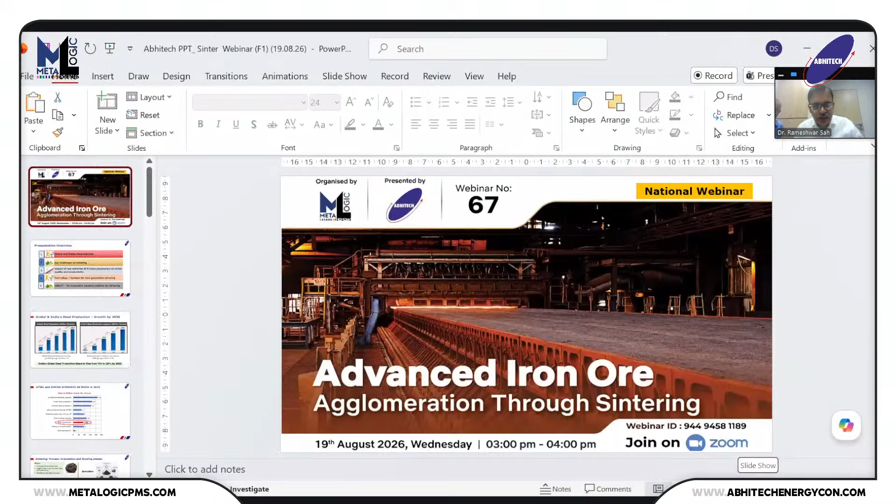The topic of the webinar is very apt and relevant to the steel industry because for any integrated steel plant, it is the sinter making which is the heart of the iron production, and that in turn is making the steel. Moving on to the slides, I have divided my presentation into 5 subtopics, which basically goes through the journey of how the sinter contributes to the steel making.

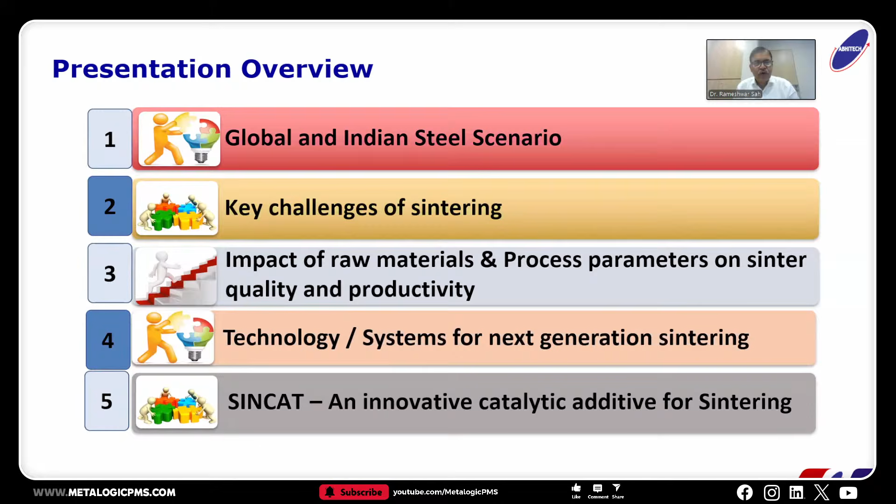So once we talk about the sinter, how can you forget about the steel? Looking at the global and Indian scenario of steel making and their growth by 2050, the global steel production is going to increase from its current level of 1,985 million ton to the level of 2,500 million ton in the next 25 years. So overall, this industry is going to grow globally at a CAGR of only 1%.

While in India, the steel production capacity charted out by the Steel Mission for 2030, and subsequently for Viksit Bharat in 2047, is at the level of 500 million tons of steel production. So India is growing its steel production at a CAGR of closely around 4%. The share of Indian steel will rise from 9% to 20% by 2050.

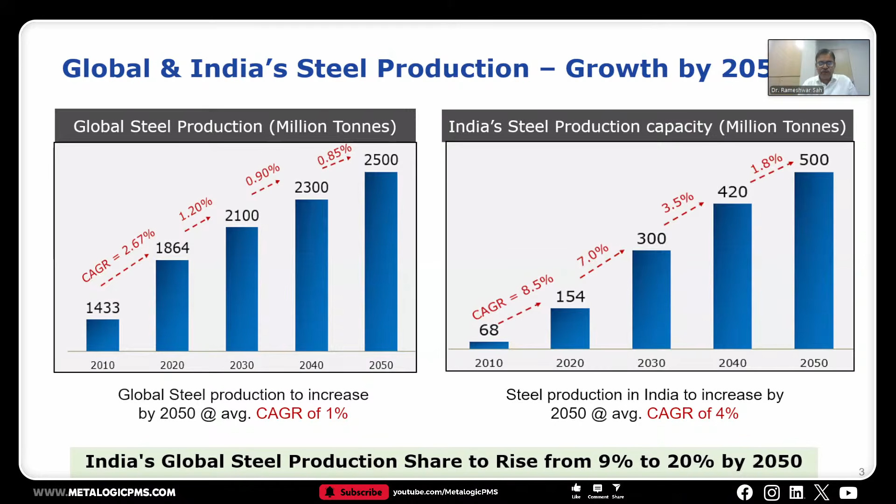Now moving on to the details of why the sinter is important. Looking at the vital statistics of steel by the year 2025, India has an installed steel making capacity of 220 million ton. The crude steel produced in 2025 was 168.4 million ton, and finished steel goes to 161 million ton. We find that almost 46% of the steel India is producing is coming through the blast furnace and BOF route, where the hot metal produced is close to 95 million ton.

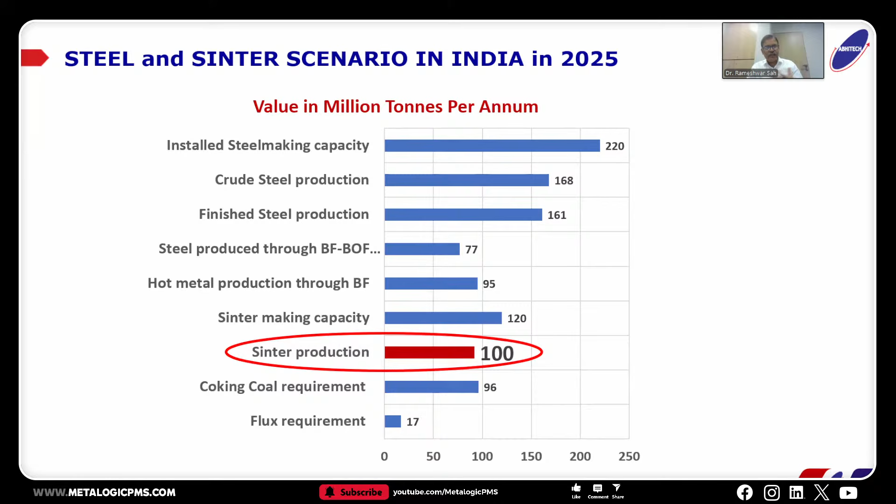To produce the hot metal for steel making, sinter is the prime feed material, and India is currently producing very close to 100 million tons of sinter every year. The rest of the requirement for steel making is in terms of coal, coke, fluxes, and others.

Just to begin with the fundamentals of sintering, since there may be audiences from a research background, steel makers, sinter plant operators, or experts, we must know what sinter is. It is basically a thermally agglomerated product of iron ore fines, fluxes, many other fines, and a lot of waste that is recycled for making the sinter. It is a strong, porous, and lumpy mass, which is the most suitable iron-bearing charge feed for blast furnaces.

What we see here is the processes that we'll discuss in detail later. The whole sintering process basically involves two important things in sinter making: the granulation and the bonding phase during sintering. It is basically the incipient fusion of the material which makes this heterogeneous mass very much homogeneous, and the product we produce is highly homogeneous and consistent in quality, which becomes the feed to the blast furnace.

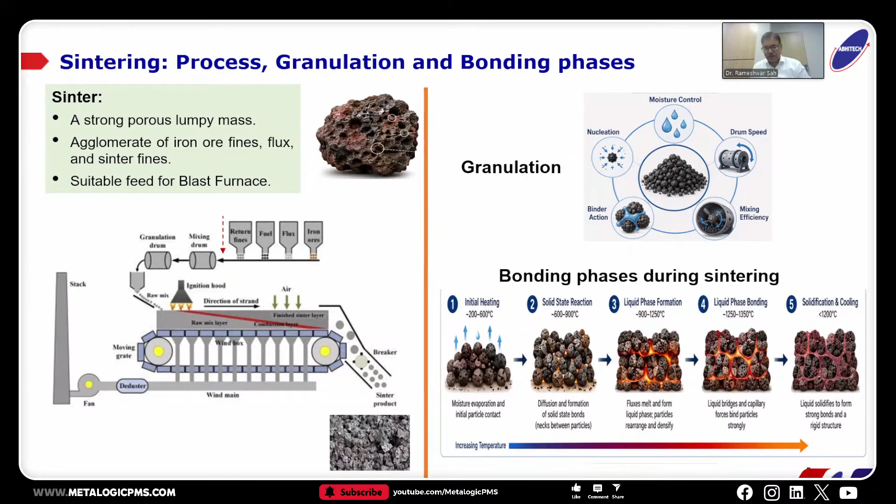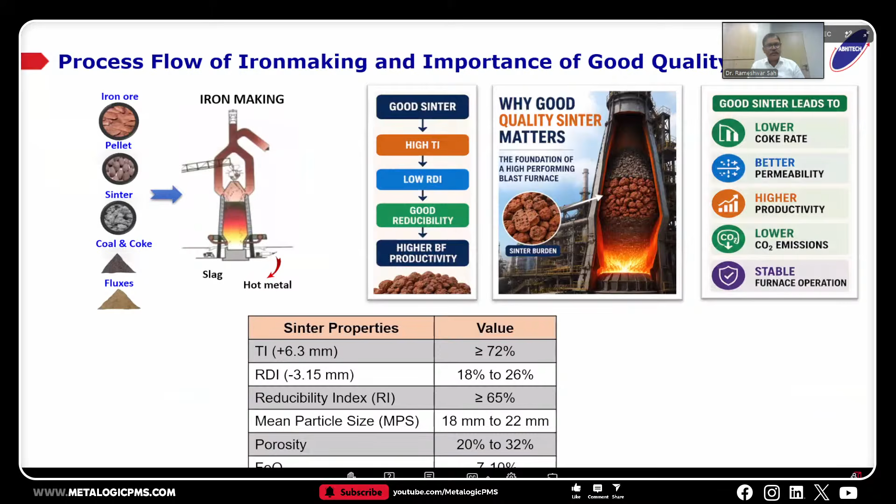Now, before going for the key challenges, let me tell what the process actually is. We are not going in detail about iron making processes, but what we see is that in iron making, basically all the iron bearing materials go to the coal and fluxes. Finally, when it goes to the furnaces, it impacts the behavior of the furnaces.

So what do we actually mean by a good sinter? A good sinter is one which has strong room temperature and high temperature properties, very good results, you can say reducibility, which is the right feed to the blast furnaces. This strong, good quality sinter will lead to very good production, very good hot metal and all its properties.

For that, the sinter properties we need must have their properties in the range we have mentioned. So a good quality sinter must possess a higher tumbler index, RDI properties, and reducibility. The operating parameters that sinter makers need to consider include what could be the FeO content, what could be the fuel content, and what kind of porosity could be there, so that it makes the right kind of product.

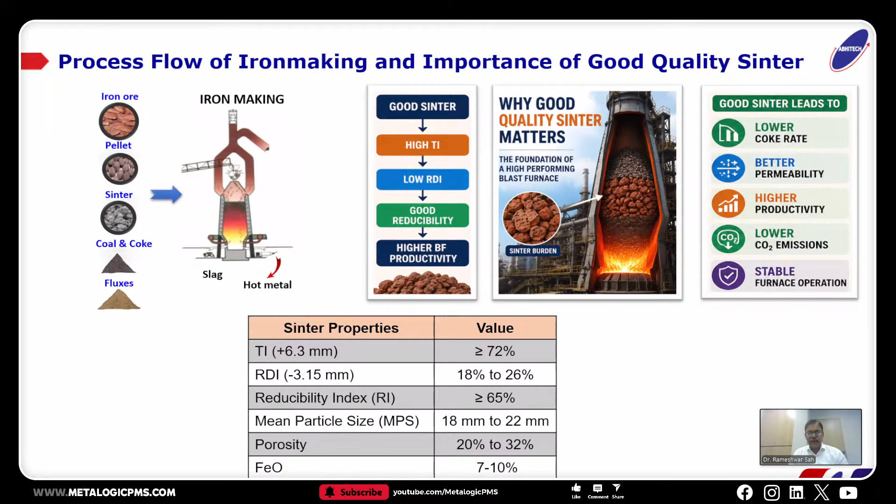Now moving on to the slides, why is sintering actually done? Sintering is not something new - it is a very established process, more than 100 years old, and it has got time and again a fresh lease of life.

So basically, if you look at the mining of iron ore, because of mechanized mining, we generate almost 65 to 70% of fines. Fines of iron ore means material that is less than 10 millimeters. These kinds of materials cannot be directly charged into the blast furnaces. So this almost two-thirds of the material produced in mining, how best we can utilize it, requires agglomeration.

Sintering is probably the most economic and widely used agglomeration process. It is a mass which is heterogeneous as input, but once you make a product, it is highly homogeneous. This is a very consistent product, having embedded properties which are very good - good porosity, very good strength - and that becomes the main feed in the blast furnace. It is basically the lifeline of the charging material for blast furnaces.

What we see basically is that the major feed for blast furnaces all over, whether India or abroad, sinter accounts for almost 50 to 70% of the iron ore charge mix in the furnaces. And that's why the whole functioning of the blast furnace becomes very smooth if we have very good quality sinters.

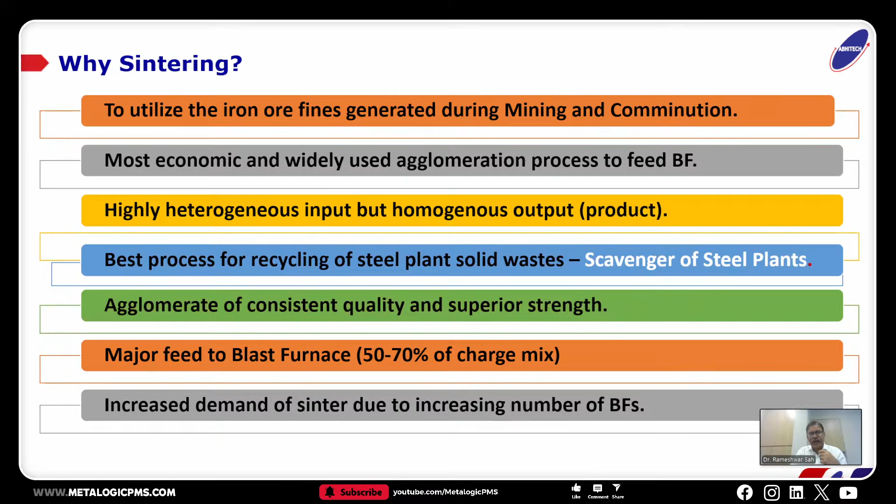Now we come to the challenges. There are a plethora of challenges - not only for the sinter makers, but for the whole steel industry. There are the first five challenges that we mentioned, all related to raw materials.

As we have gone over the years for preferential and selective mining of iron ore, now we have almost exhausted the high grade ores, so it is only the low grade left. The low grade refers to less iron component in the iron ore and more gangue materials. So those are the impurities that we need to handle.

And to handle those materials or the microfines that we generate, that makes the sinter making very challenging. Beyond that, if you go for the sinter makers, the more important part is the operating parameters, how basically the critical processing parameters they maintain.

Once they produce a sinter, the process is designed in such a way that whatever this lumpy mass needs, we need to again size it, make it a suitable size range which is amenable for the blast furnace as a feed. So during the sizing and crushing processes, we generate a lot of fines.

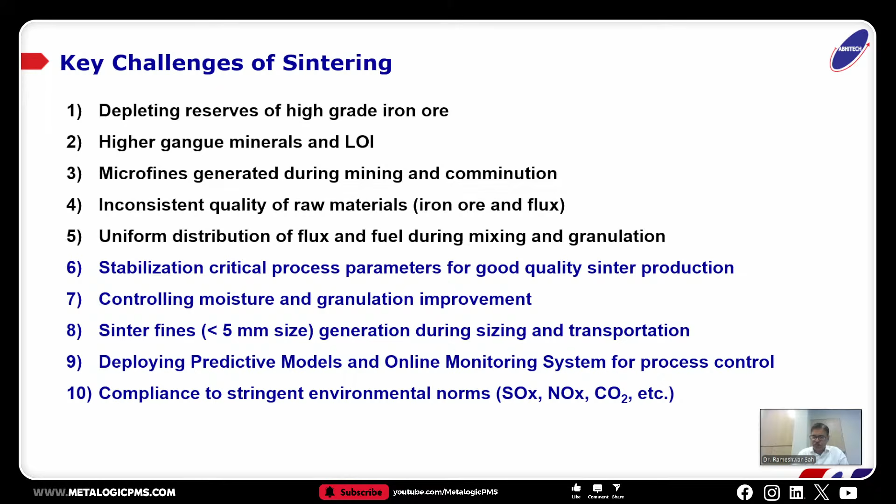Now moving on to the raw material parts. Here we see the different kinds of challenges which come, but challenges to the sinter is basically challenges of the iron ore itself, because that is the main raw material. And there, increasing the gangue minerals basically makes your whole process very stringent and more costly.

If more gangue materials are there, you need more fuel requirement. You are making more slag and less metal. So all these higher silica, alumina, alkalis, or all these fines, they are all basically blocks in your process system. So how to handle that? That basically makes the challenge for making the raw material parts of this sinter.

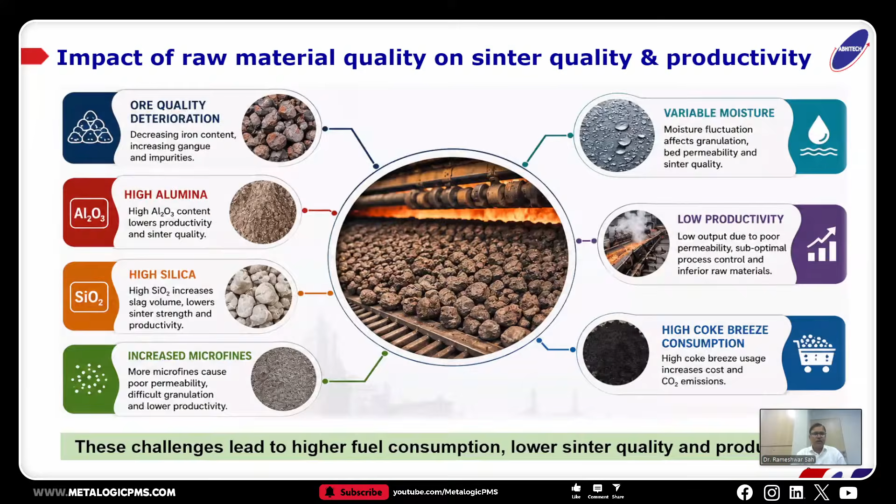So moving on, this very precisely what the silica is. These are all undesirable things, but it is not absolutely undesirable. Certain amount of silica is required because it helps in making the slag phase, which is good for the bonding. Because if the slag phase formation will not be there, we will not be able to produce a good quality sinter, a stronger sinter.

So looking at the trend, beyond 4% silica, it is going to be more poor in the quality of the sinter products. It reduces their strength properties, as well as the reducibility.

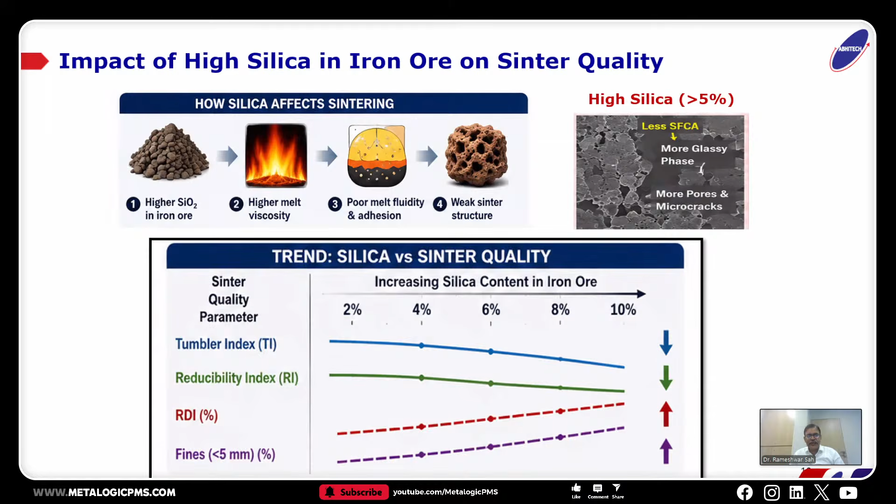Similar is probably the effect of the alumina. Alumina, rather, I would say it is a bigger problem than silica for the sinter makers. Because this alumina being a refractory mass, it has a higher melting point. It increases the melt viscosity, and it stumbles blocks for making the SFCA formation, which is the strong bonding phase. It makes your bonding poor, and ultimately you are landing up with a very poor quality of sinter.

So this alumina needs to be handled, and there are ways. Earlier we'd say combinedly the silica and alumina should not be more than 5%. But that time has gone. Now the materials that are available, we have to live with that. India has so much reserves of iron ore and coal that we have to make the whole study self-reliant and sustainable.

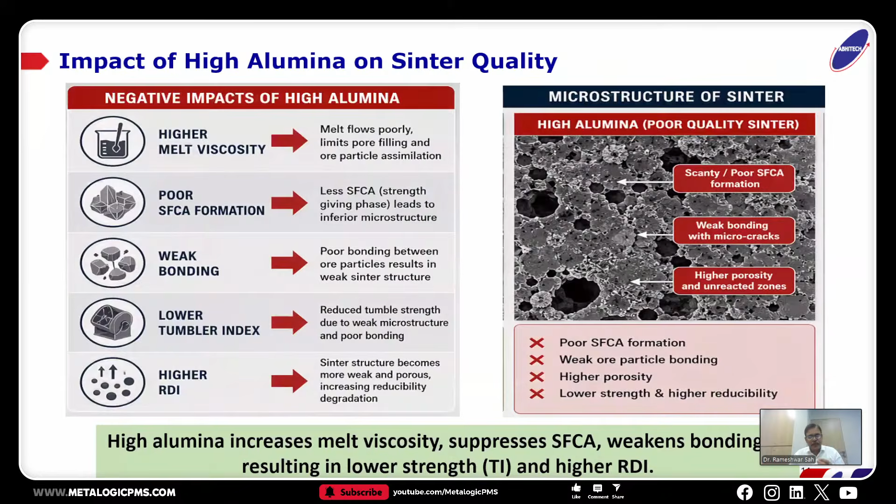Coming to the microfines, there are two terminologies in the industry normally used, which is less than 0.5 millimeters also for the microfines. People also sometimes use less than 0.15 millimeter, that is 150 micron. All these fines are basically detrimental for the sinter making processes.

What these fines do during the process of sinter making is they basically don't help granulate the sinter green mass. So what actually happens is it either fills up the pores and thereby blocks the flow of the gases. Once the flow of gases is blocked, the process of sintering becomes very slow because your permeability goes down. So all these microfines, there has to be a limitation.

Looking at the graph, we can see that the micro-fines should be at the level of 25 to 30%, because some micro-fines are required. Coarser fines in the granulation act as nuclei, and the finer particles get coated - that is the basic principle behind granulation of the sinter mass. But if it goes beyond 30% or so, it becomes harmful for making good granules and ultimately affects the permeability and others.

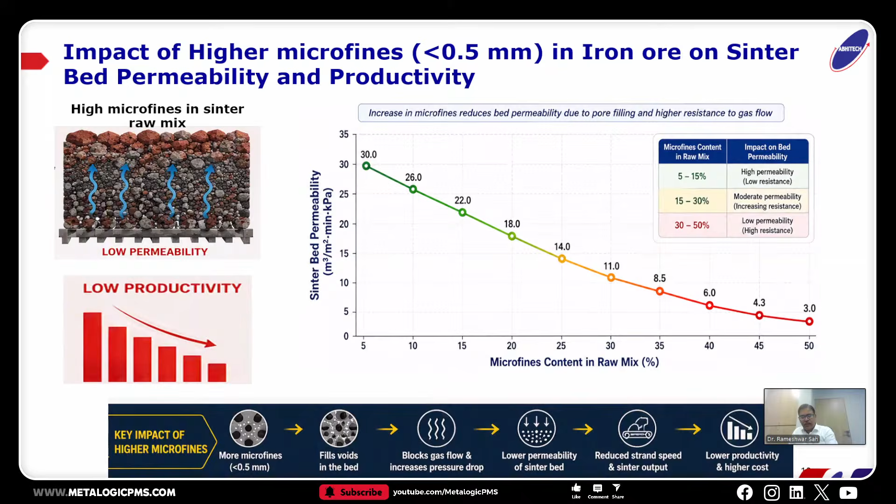Now coming to another aspect, that is the lime quality for the sinter. Normally we need to maintain certain basicity in the sinter, for which people add flux. That is mostly, invariably everywhere, either limestone or dolomite.

The advantage of burnt lime is that it has extremely high reactivity, and at the same time it has a much larger surface area. This helps in the binding and improves granulation. Since this is a calcined mass, it doesn't need heat in the sinter making furnaces - rather, it transfers heat faster to the iron ore particles, making them incipiently fused faster and resulting in good assimilation. Once this molten mass is well assimilated, it helps expedite the whole process.

So sinter makers take the liberty of using a higher percentage of burnt lime, and the quality of the burnt lime, to make the process faster or make a better product. They can even play with the sinter machine speed - if they have good permeability, they can increase the speed and improve production.

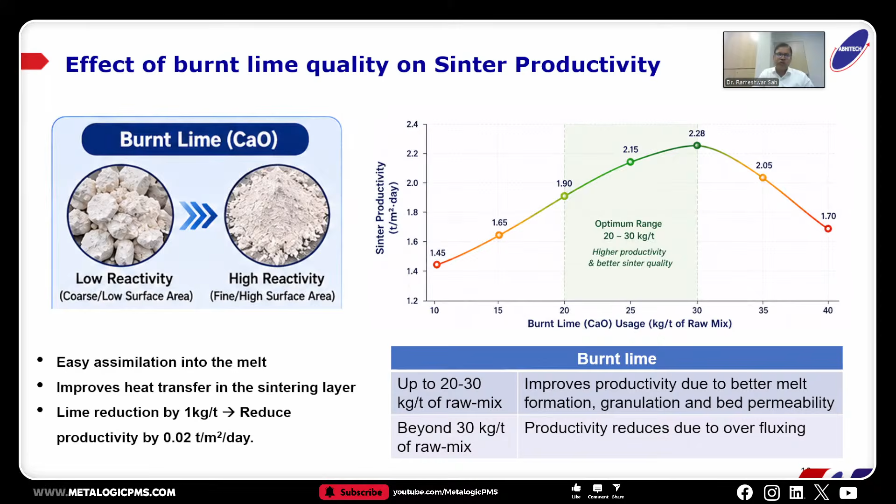Now coming to another aspect beyond the material part - the more critical sintering process parameters. There may look to be many, but all these process parameters need to be controlled, otherwise the sinter plant's efficiency, in terms of productivity and energy, gets lost. What we see is bed permeability, bed height, suction air - this is all monitored along with the BTP.

If you achieve the burn-through point fast, just before your last stage, it gives you enough time to increase your sinter speed and improve productivity. So all these parameters are very helpful.

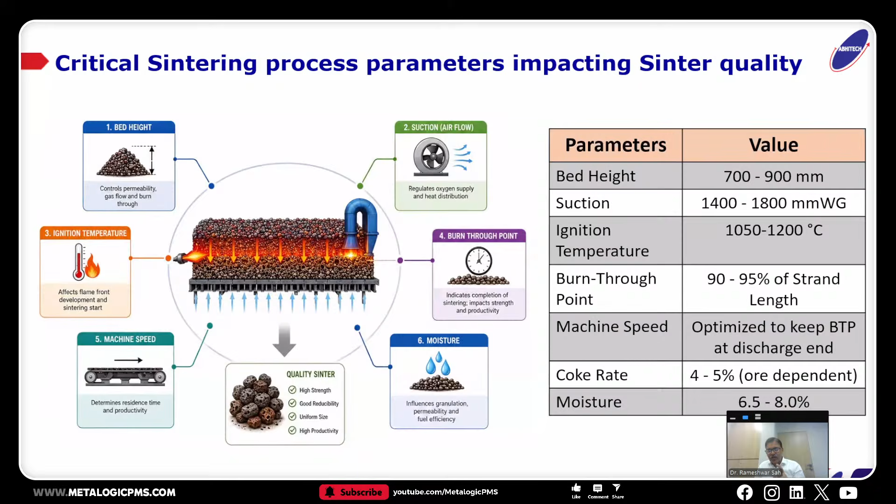One of the parameters is moisture control in the raw mix, which plays a very big role. If there is low moisture in the sinter mix, it becomes a dry mass - these are loosened particles. This ultimately hinders the process, the suction, everything, and creates voids.

If there is more moisture, the granulation size will be oversized - you get very large and irregular particles, which also don't help the process move faster. So there is an optimum moisture control level of 6.5 to 8%, and that helps the sinter bed permeability be much higher.

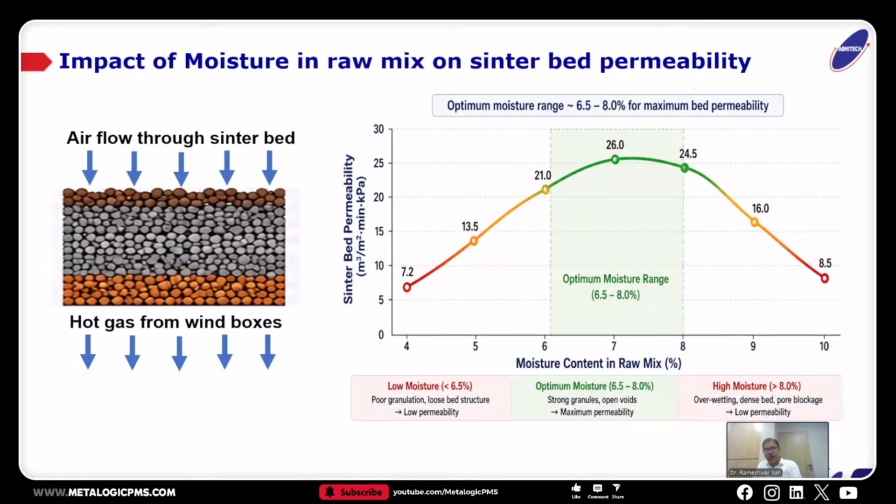To better control the moisture, there are now equipment with online moisture testers. Beyond the raw materials and process parameters, we need technology and systems intervention that helps improve sinter quality, productivity, or control the process in a better way.

If the materials are not good, and whatever supplier availability there is, we have to live with that. So we need to think about external agents or additives which can help improve the process and the equipment - certain kinds of catalytic or functional additives that change either the material characteristics or surface behavior, and that will help.

The processes need to be automated, because a lot of dynamic control models are required since the process is so dynamic in nature. If you don't have control over that, if you don't know how the process will behave depending on changing variations in raw materials or process parameters, you need to make your process more automated, so as to have better control over the process and the quality of the product.

So there are smart moisture controls, advanced ignition systems, and others. Nowadays, in the digitalization space, AI and ML help create a lot of predictive models, which are basically dynamic control models. These help transform your sintering process to a higher level, where you can have less manual intervention and more automation in the system. That makes your iron making product very competitive and cost effective.

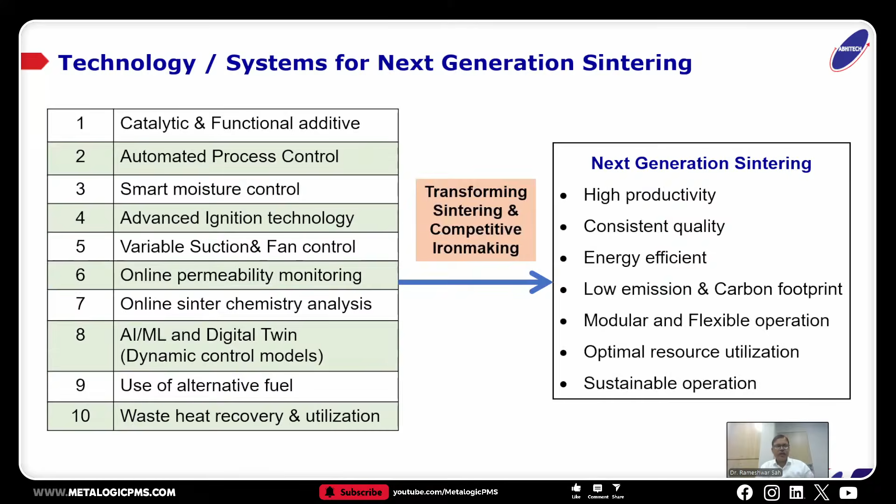So the next generation sinter requires all these properties, which we can achieve through these systems and technology adoption. Now coming to the predictive models also, there are a lot of softwares and different control models that can be developed, which basically, in advance, based on historical data, predict the sinter properties.

If you look at all these properties, this historical data helps identify where your process is getting deviated, so you can control your deviations. There may be online permeability monitoring, which keeps giving real-time information on how you control the variations, how your bed is behaving, and how it enables timely control of your suction and speed or moisture, and all the parameters which will help you.

There is also online sintering chemistry analysis. This equipment helps control your basicity and other parameters, which in turn helps make your product strong in terms of strength properties and final quality. So all these predictive models are very much like a guide to the operators, where they can control the processes, and by controlling the process they can control their product quality as well as productivity.

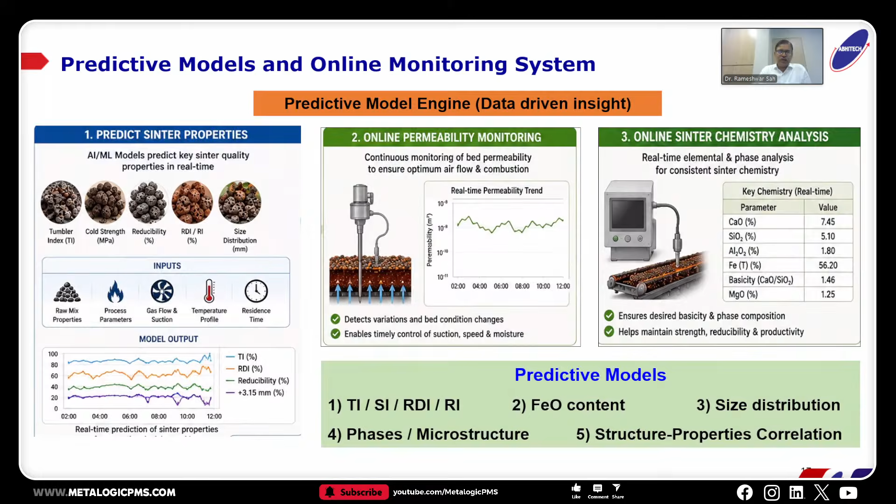Now coming to that, sinter in an average steel plant is a very energy intensive industry, and it controls more than 12% of the energy produced. It is also quite emissive because 8 to 10% of the CO2 emissions worldwide come from the steel industry. So here the role of making the process more energy efficient comes into picture.

We see that sinter alone, in the whole steel making process, consumes around 10% of the energy. And since sinter is an open bed process, almost 40% of the heat is lost into the environment. So what we need to do is capture the waste heat recovery as well as recycle whatever hot gases go out.

There are different technology suppliers like Primetals, VAI and others which have these systems. Many sinter plants in India, particularly JSW Steel, have installed these systems and are getting the benefits. Tentatively, we have worked out for a plant capacity of around 2.5 million tons of sinter, producing around 10 to 11,000 tons per day, that through a waste heat recovery system you can utilize the heat for steam purposes or drying or other applications, giving an annual saving of around 2 to 3 crores per year.

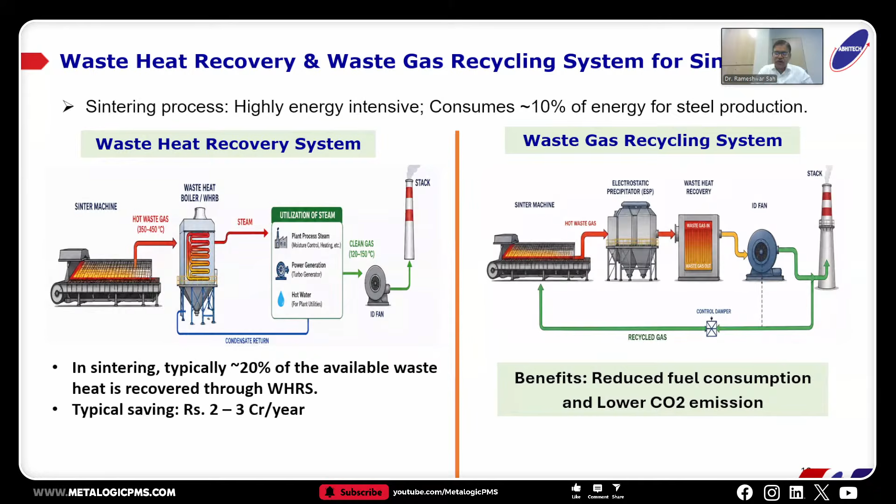A further benefit of controlling this energy is that by reducing fuel consumption you reduce the carbon footprint by emitting lower CO2 emissions. Coming to CO2 emissions from the industry, from the environmental aspect, we find that the waste heat recovery system combined can reduce around 30 kg of CO2 per ton of sinter.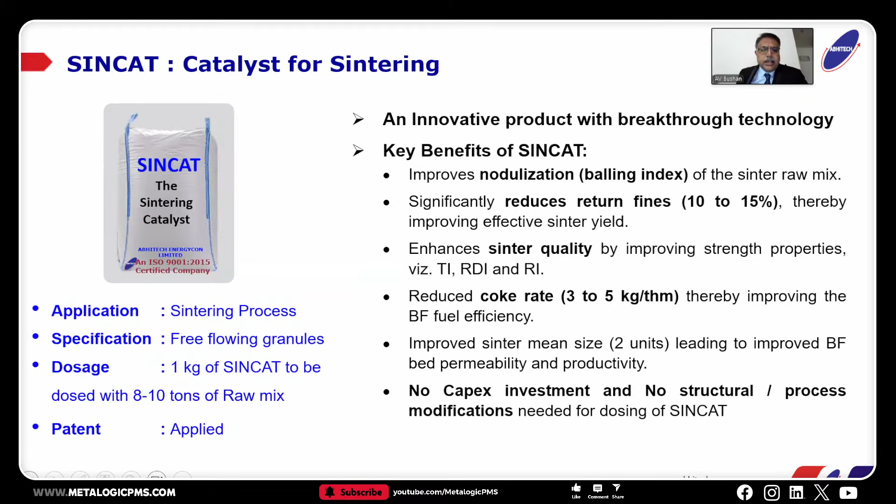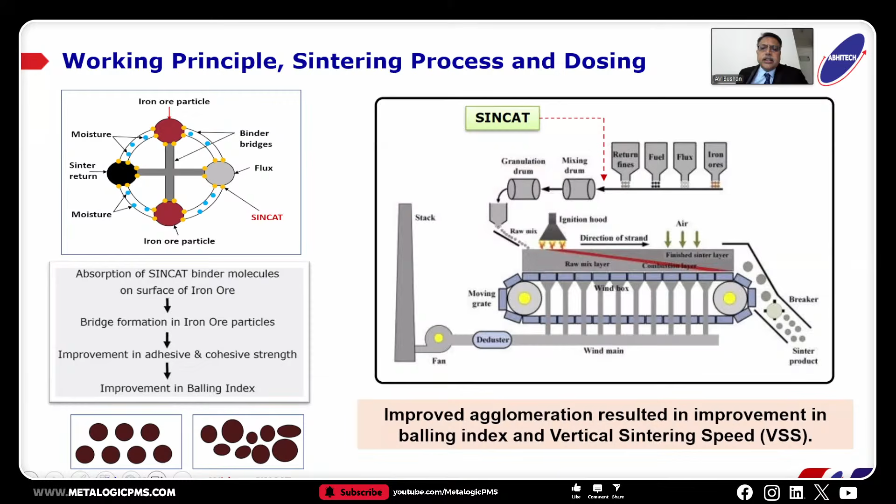So I will quickly go through the working principle of the sintering process. The SINCAT is basically a product which has been designed to absorb the binder molecules on the surface of iron ore, and it forms a very good bridge in the iron ore particles. It increases the bonding strength, both the adhesive and the cohesive strength, and therefore improves the Balling index. So when this happens, you have an improvement in the overall sinter quality and reduction in the fines because the strength of the sinter also improves. Next, please.

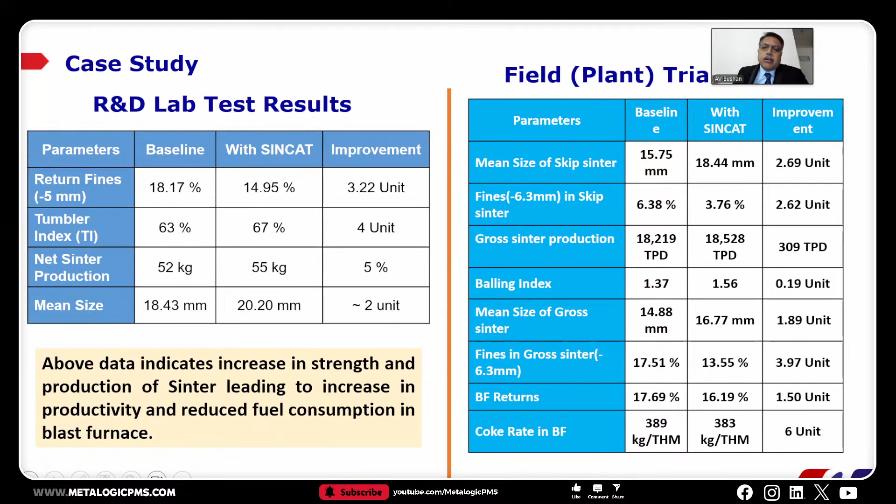So what we have done is, these are the case studies. We have taken trials of the product at our own R&D, and these are some of the results that we have got. We have also done a commercial scale plant trial in one of the plants in India, and we have got very good results, which is displayed on the right side of the screen, the field trial results. So let me go through the R&D lab test results.

You can see the reduction in the sinter fines were very significant, 3.22 unit reduction. And similarly, there was an improvement in the tumbler index, and of course, the improvement in mean size. The increase in the mean size obviously has a huge impact on the performance of the sinter and the blast furnace.

Similarly, in the field plant trials at an integrated steel plant in India, we have been able to show an increase in the sinter production along with an improvement in the mean size and a reduction in the blast furnace fines. If you see the -5mm or -6.3mm fines reduction, it has been very significant, 30 to 40%. This led in turn to a reduction in the coke rate in the blast furnace by as much as 5 to 6 kg per ton of hot metal, which is a very significant factor. Next, please.

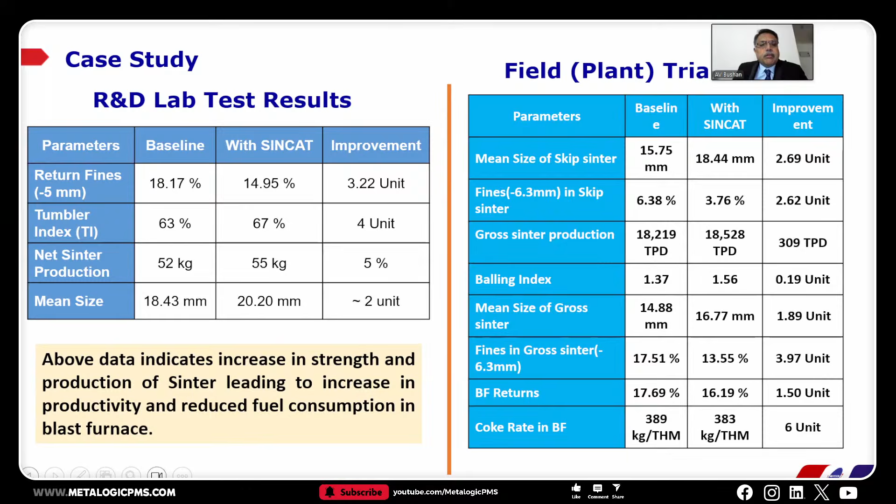So there is a typical sensitivity index which is followed by most of the steel plants to assess the impact of various products or technology interventions on the blast furnace. Because of the variations in the process, the impact may not be measurable all the time, so there is a sensitivity index. We have given broadly the 4 important sensitivity indices, so to say.

The improvement of the mean size, what is the impact? The impact is 3 kg of coke rate reduction in the blast furnace, which can result in savings of almost 11 lakhs per day, along with an increase in hot metal production of 2%. So if you see improvement in the mean size, reduction in -5mm in the skip sinter, which is the final sinter going into the blast furnace, and similarly the increase in tumbler index and improvement in RI — these 4 factors or criteria have been considered here, and then the minor improvements have been considered and monetized.

When you take in the total value almost obtained, it's close to 70 lakhs a day in Indian rupees, which is about $70,000 to $75,000 a day. This is on the basis of a 5 million ton sinter plant gross sinter production per day. We have considered that all the sinter will be used in the blast furnace, resulting in roughly 11,000 tons of hot metal per day. We have considered a coke price of roughly $330 per ton, or 32,000 rupees per ton, and a hot metal conversion cost of 7,000 rupees per ton.

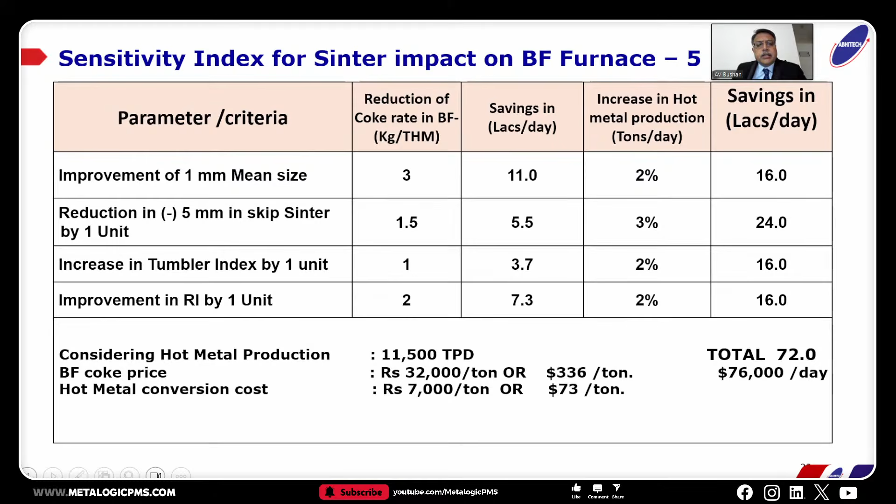Similarly, there is another technology intervention we are working on: developing a catalyst to reduce coke breeze consumption in the sintering process. As you're aware, coke breeze imparts the fuel and carbon requirement, raising the temperature, and is considered a valuable material today. By improving the combustion reaction kinetics, we try to reduce coke breeze consumption. The working principle is that improving coke reactivity results in a faster carbon-to-oxygen reaction and better carbon conversion, therefore resulting in more effective heat release and lowering the coke requirement.

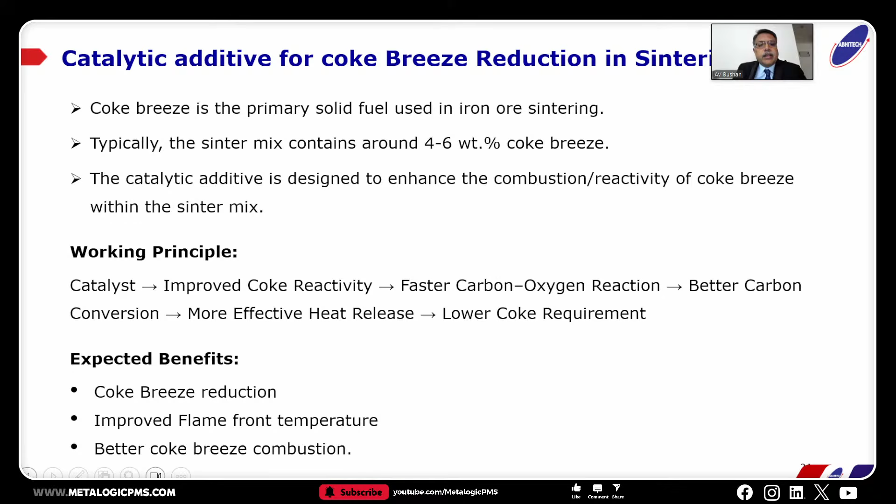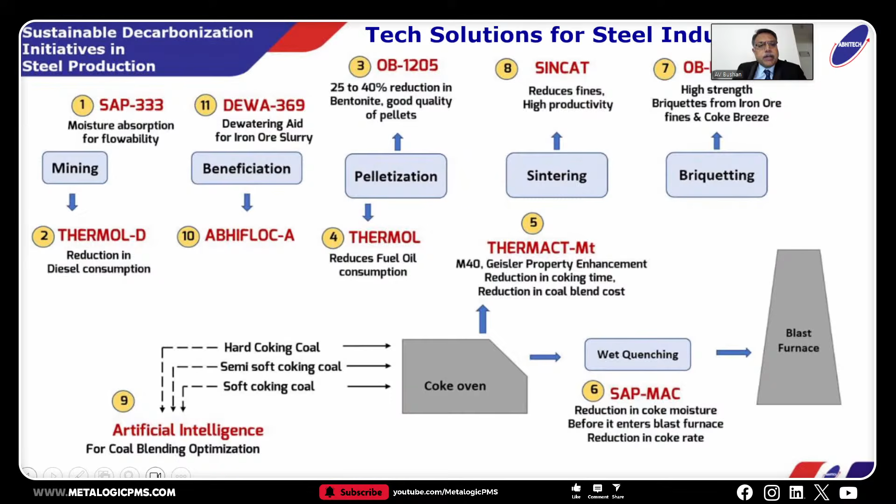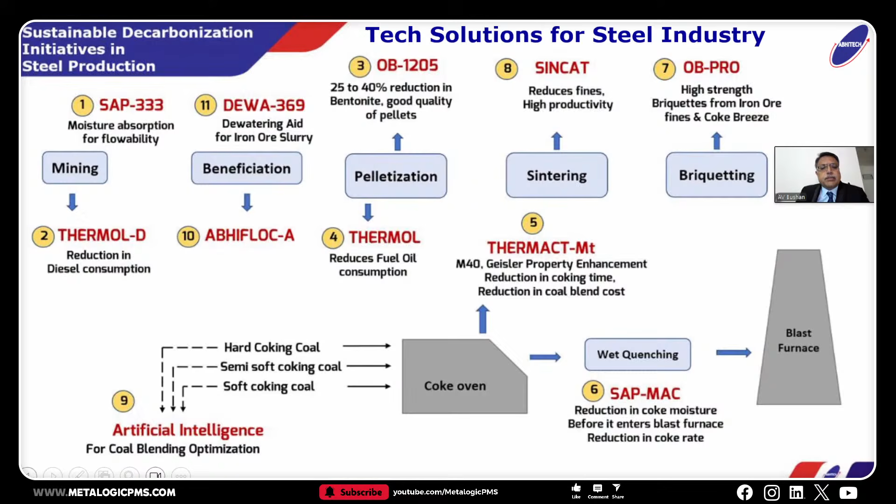So these are some of the technology solutions we provide for the steel process. We are very prominently present right up to the iron zone. I will not get into the technical details of each product, but right from the beneficiation process to the blast furnace, we have products including sintering, and these add value to the operations and improve the overall process efficiency of various unit operations in the iron process. We would be very happy to discuss and provide any suitable solution for your sintering challenges and related issues. Thank you very much.